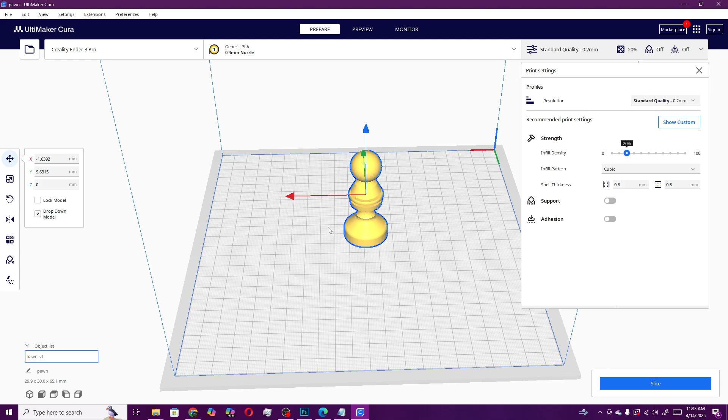Today we're going to go over some of the basic settings. Now, as you can see, I've already got my model in here. I've been making these videos back to back, even though they're not coming out that way, but let's see. I drag and drop, you bring your model in, okay? This object needs to be either a 3MF or, in my case, an STL.

I will show you where to find files in a later video. It's pretty easy to find models. You can pretty much get them for free anywhere, and you can make your own, obviously. We'll go over that in another video, as I said. But for now, go ahead and drag any model you may have onto the build plate. If you don't have one, check out www.thingiverse.com. Pretty much all those models are free. You can download them and use those here.

Let's go ahead and take a look at what we're doing. So let's just go through these one by one and kind of explain what the minimum settings do. This says resolution. That is basically your quality. That's why it says standard quality here, and it is set to 0.2 millimeters. That means that each layer that the printer prints is going to be 0.2 millimeters high.

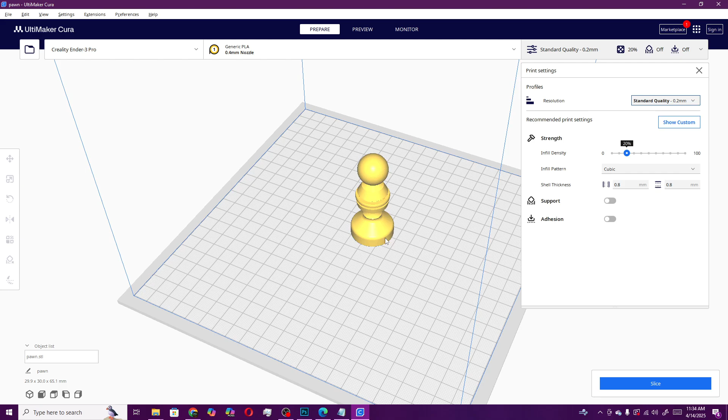Now, the larger this number, the larger the layer height, which means you're going to see larger lines and they're going to have deeper grooves, but you're going to print a lot faster. So if you reduce this number, you will get finer layer lines and it will take longer to print, but you will end up with a much nicer print. That is not true in 100% of cases, but it is true for 99 of them.

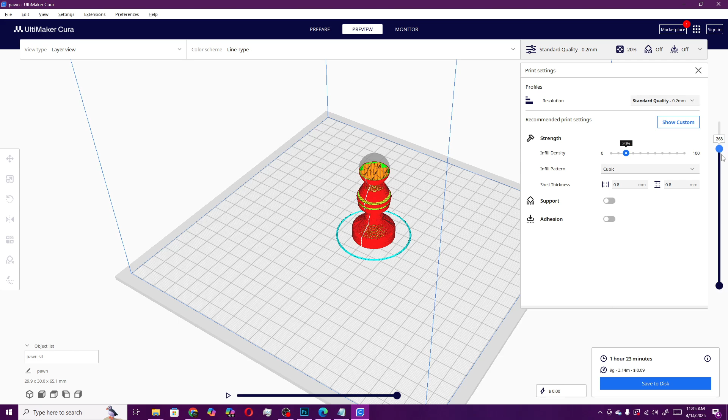So the next setting we're going to take a look at is infill density, and I'm going to go ahead and slice this. It's pretty quick. We'll jump over to preview mode, and as soon as it's done, we can slide down in and look at the infill. Okay, so right now we are using a pattern that is called cubic, and you can see what the cubic pattern looks like. It is basically just triangles of varying sizes, which create triangles and little tetrahedral boxes in there.

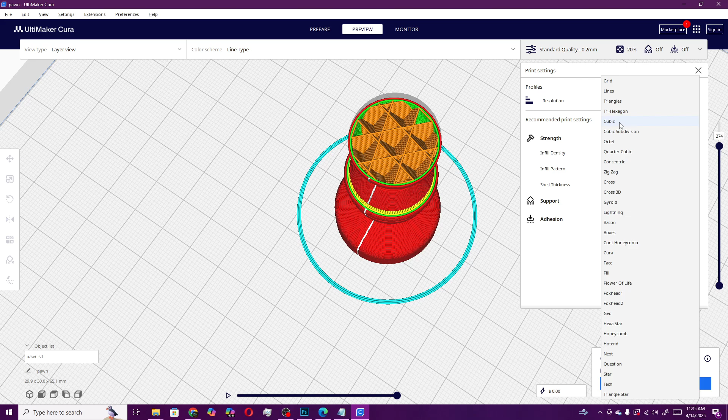There are other settings. Now, you won't have all of these because some of these I've made myself, and some of them are other ones that come with them. But I know cross comes with it, grid comes with it. That's a nice easy one. Cubic, octet, I believe zigzag. I know lightning does. Honeycomb as well, I think. Now, I think they added that in one of the later versions. And you can see how that works. It is just a honeycomb.

So whatever pattern you choose, it is going to alter the amount of filament you're using, but not by much. The way to make it denser is the infill density here. And if I increase that to 70%, that means 70% of the object is going to be filled in. And you'll see that it's a much smaller honeycomb now, right? If I want to go all the way up, get it really fine, and really make a solid object, I can do that. I have the infill density at 100% right now, and you can see that, like I said, they're way finer honeycombs, right?

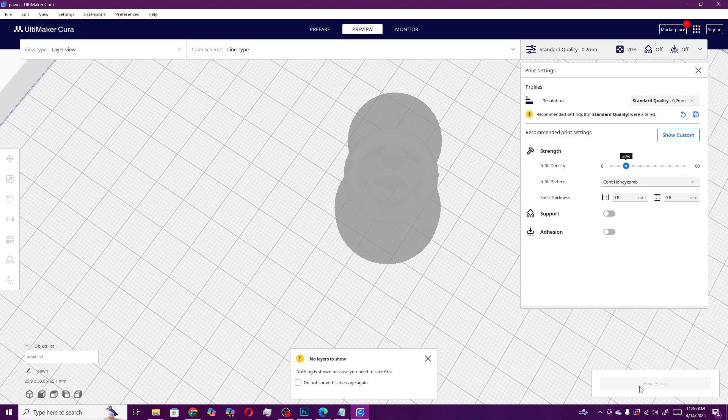So basically this shrinks and enlarges the pattern, but the smaller the pattern, the more filament it uses to fill it, so it fills more space, which makes the object heavier, and we are now up to 14 grams, when down here at 20%, we were at 8 grams of filament, I believe. So we've nearly doubled our filament by increasing it to 100% fill.

You would think that it would actually be more than doubling it, but the outer shell does take a substantial amount, and the thickness right here, this is the width, and this is the height on flat parts, like say the bottom, how the bottom layer is going to be 0.8 thick. So if I have 0.2 millimeter layers and my bottom is 0.8 thick, that is 4 bottom layers before it starts the infill process. Okay, that's how the shell works.

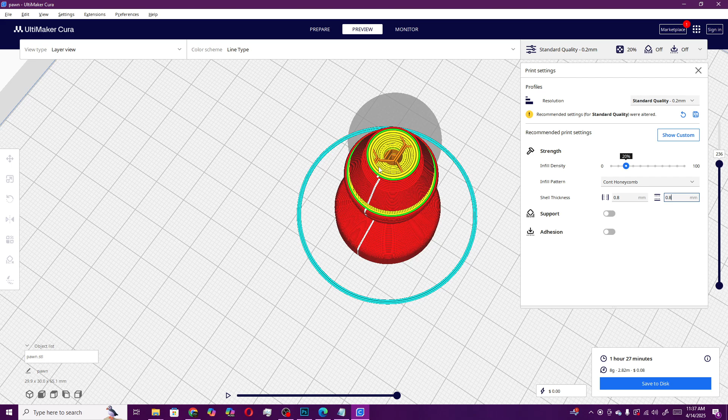The same with the walls here. Now, this is actually divided by the width of the nozzle and not my layer height. So most are 0.4 nozzles. This is going to be 2 passes, and to get it exact, it actually does a 3rd pass around the outer edge, as you can see, but it's kind of overlapping to make sure that the width is correct. So you can change that. You can make it thicker.

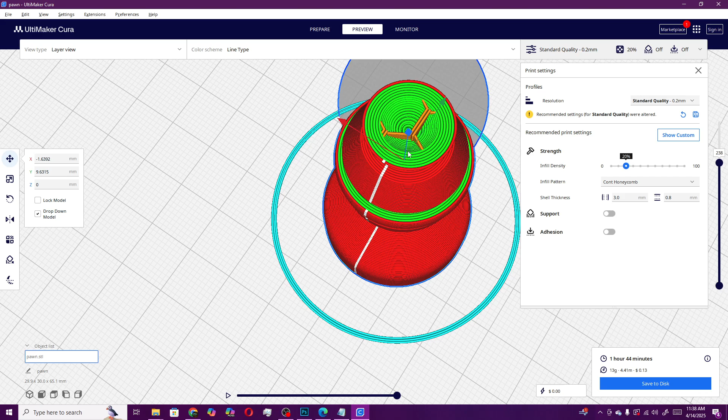Say I make my shell thickness 3 millimeters and slice it. Depending on the size of the object, if it's less than 6 millimeters, that will also 100% fill it in. But you can see that I now have several layers of shell there, denoted by those green layers in the ring, and still just the one outer layer. Okay, so the other two things that they have in here for settings are support.

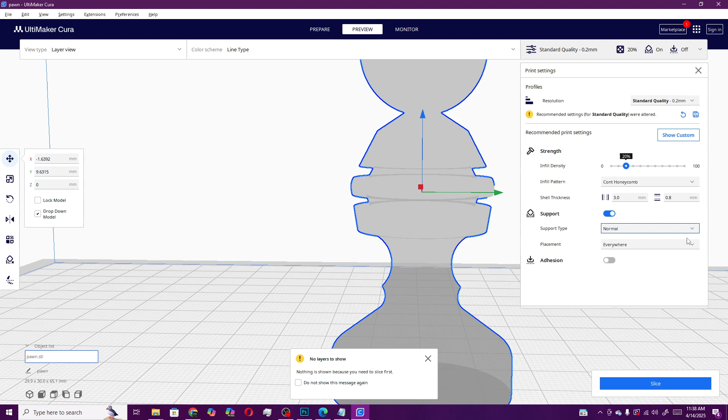And support is how you keep flat parts hanging out like this, or what they call overhangs, from drooping when you're printing. And support should come off pretty easily. So we have normal support and tree support. I guess we'll try them both here. I don't know if it's going to support much of this. It's probably going to go, yep, there we go. Okay, so that's attached to the model, and it's holding it up here.

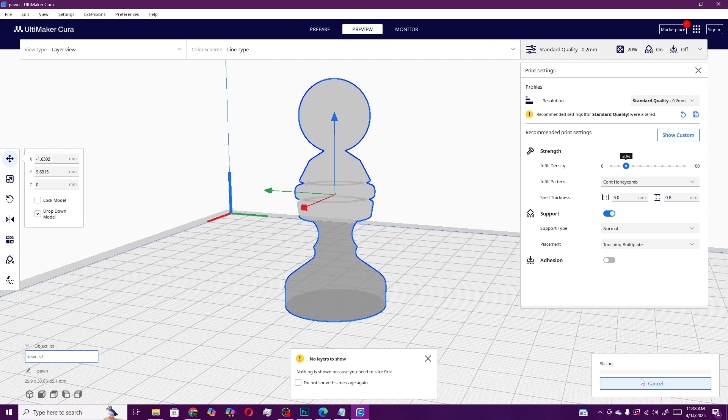If I don't want to touch the model, I can change this to touching build plate, and slice it again, and then anywhere that had support that was touching the model itself won't have support. So I pretty much basically turned it off, and we don't want to do that.

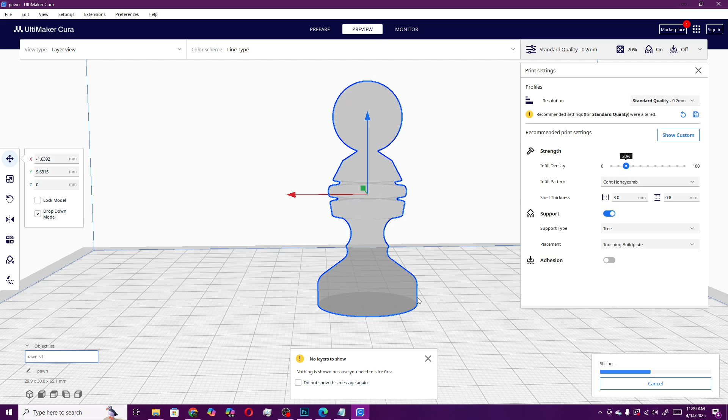So we're going to check out the tree support, because tree support is more organic and will flow with the shape. So we should be able to start our support down here on the bed and have it come up and still hold our object without actually being fused to our object on the top and the bottom. Now, tree support does take a little bit longer to slice, but as you can see, none of that residue or connection is going to be left on the bottom side of the model. It is all on the underside of the model here, where it comes into interface.

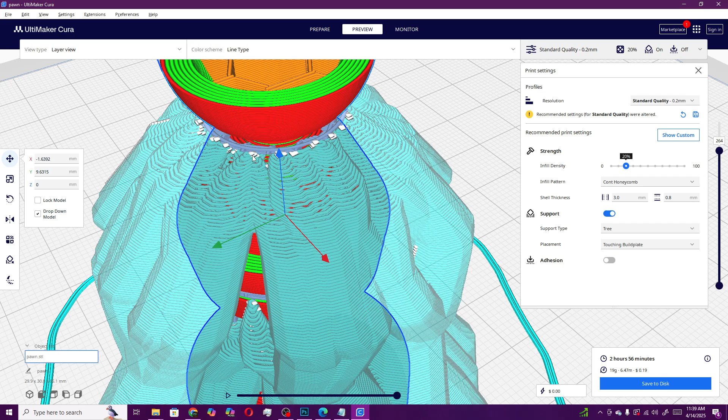Later on, we'll get into the settings that determine this actual mesh right here, which is your interface mesh. There's generally a small gap between that and the model, small enough so that they will stick, but not small enough so that they will bond, and that is how you release your support from the model. So you're going to need to make sure that you check that video out if you're having issues removing the support that you put on the model. But as you can see, it should print the whole model pretty well.

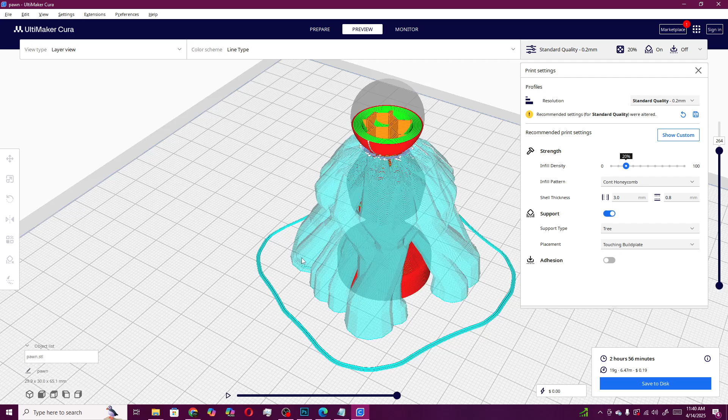We are now back up to 19 grams of filament, so that's something to keep in mind if your object needs to be supported. Maybe check out and see if there's a better way to orient it so it needs less support, or see if you can do something to minimize the extra plastic you're using in there.

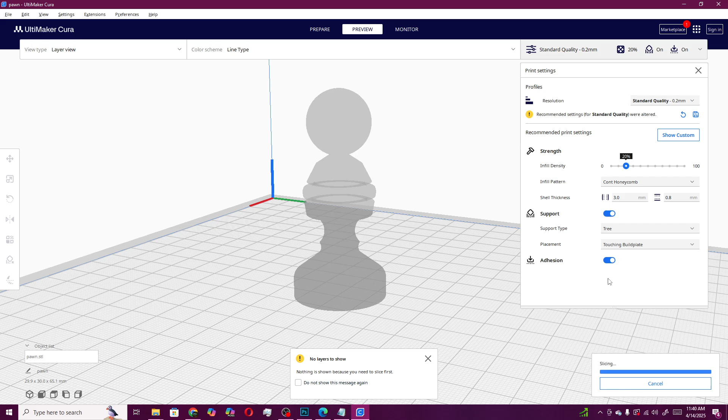So the other setting they have here is adhesion, and this is important. It doesn't really give you the options that we're going to go over in the adhesion section in a later video. It basically just is or isn't. And I believe, if I'm right, it's going to put a brim on the object. Yep, that's correct. Okay, so this layer all the way around, let's go down to the bottom layer here. The inner blue layer is the support, most of it, right? And some of this as well. But the reason this large ring is here is because that's what's called a brim.

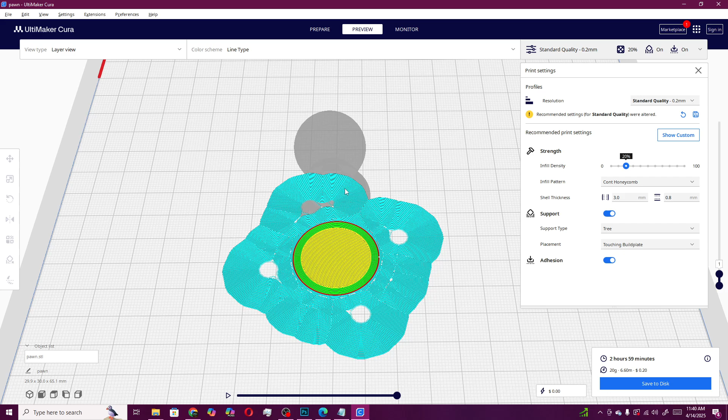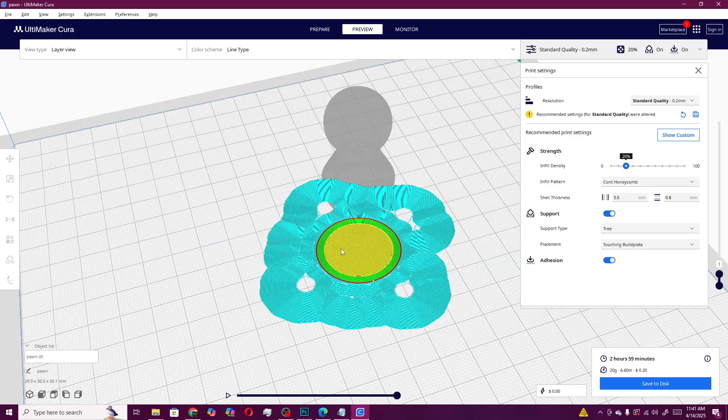And a brim is going to make sure that while it's moving really fast up here, the model doesn't start rocking back and forth and loosen itself from the build plate. That's why it's in the adhesion section. It helps the model adhere to the surface that you're printing on by creating a lot of surface tension, sucking on the build plate, basically. It's like one of those sticky window things, right? It's harder to knock the model off because it's harder to get air underneath it accidentally. So that you want to be pretty smooth and flat. That's one of the reasons your first layer is crucial.

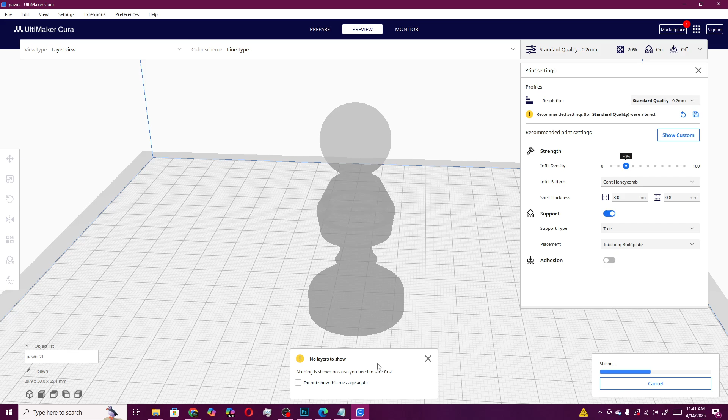If your object's not super tall or it doesn't have sharp corners on it, you don't necessarily need a brim. You can just use a skirt, which doesn't actually touch the model. It's just a ring around it out here. But that's a good way to purge the filament and make sure that it's flowing properly before you start your model. That's this ring right here. And it pretty much does that automatically.

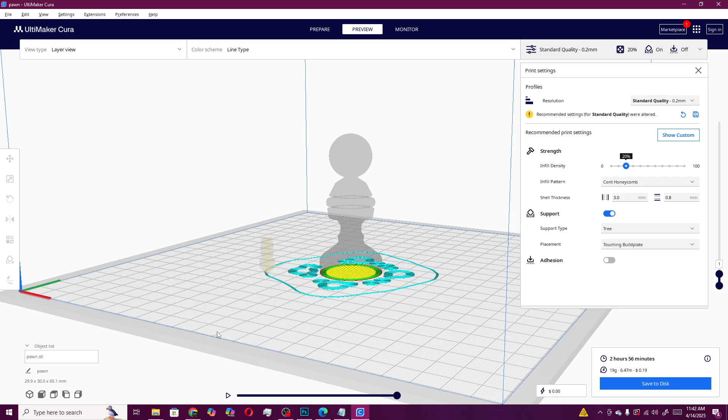There is another adhesion type called a raft, which will build a platform with as many layers as you designate all the way. It uses quite a bit more filament. But if you're going to be printing something with a large base, sometimes it's really handy, because if you don't have something for adhesion on models like that, you get corners lifting and things like that.

So that is the basic settings. Now that we've gone through this, you should have a little bit better control or idea of what everything is doing. In the next few videos, we are going to go over some of the settings more in depth. In the next video, I'm going to show you where to find a bunch more models that you can get for free, and we'll talk about ways that you can make your own with software that is free.